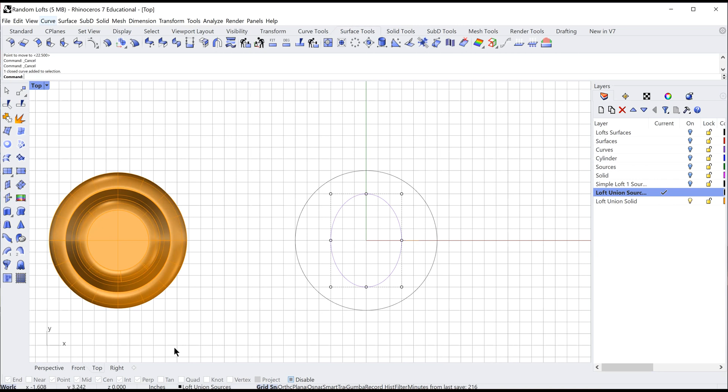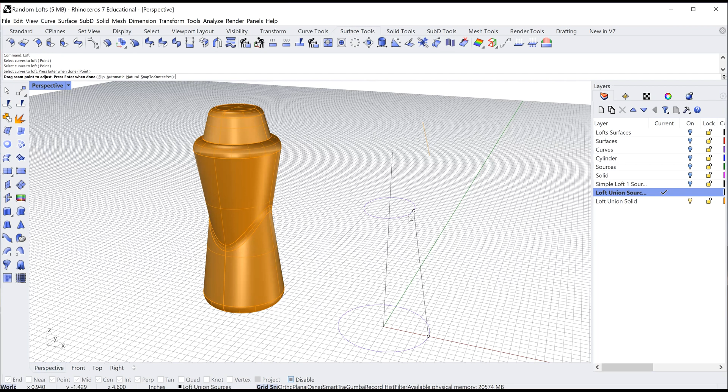So it's actually quite simple. I'm going to loft this, and I'm going to go into my commands, loft, select the bottom, select the top. There's the leading edge, the orientation of the points in the beginning to the end of the surface, and then enter again. And then I have this, and I'm just going to stay with normal.

So there's my loft. Now these lofts, I'm going to mention this now, this is like a cone. I know it's going from an oval to a circle, but I have a straight edge going vertically, which means I can put labels on the bottom part of this shape and the top part. So I could do a pressure sensitive label. I could even do a label that's parallel to the top edge and maybe even dips down in this curve a little bit. So maybe that's part of the look that I like.

So since this is symmetrical, I'm looking at this bottle from the front and I have the negative curve. If we look at this bottle from the right, we have the curve down here at the bottom in a positive orientation. This bottle works in both directions. So it's kind of a unique shape by doing this kind of double loft.

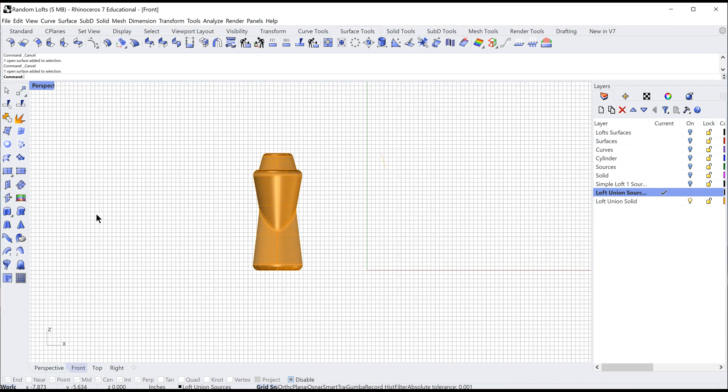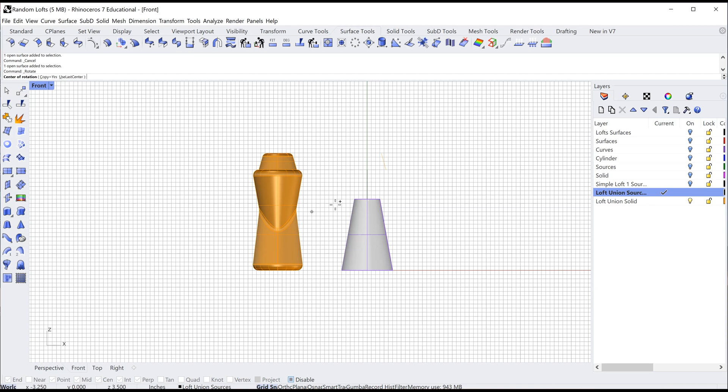So I'm going to select this lofted surface, and I'm going to go to my front view, and I'm just going to rotate this. Rotate a copy. So I'm going right to my rotate tool. You can use the commands. The center of rotation, and I have copy here. I've selected yes, so I want to copy that. So let's make sure I'm going to snap to this top right here. It's going to click here. I'm just going to go 180 degrees, and there's my copy.

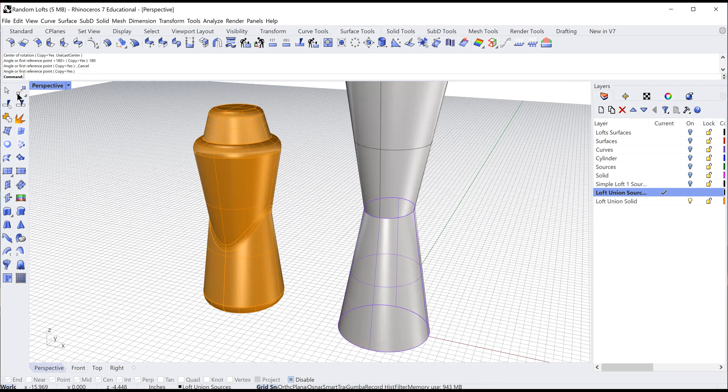So as you can see, the oval section right there in the center is lining up because they're both the same. So if I take this top, let's see, how did I have this one oriented? I'm going to try to keep this orientation.

So I'm going to take the bottom one, and I'm going to select that. And I'm now going to look at this from the top view. All this can be done in perspective. Like I had mentioned before, I like looking at one view at a time. I'd like to kind of follow exactly what I'm doing. So since I'm rotating from the top view, I want to look at it that way. That's just sort of how I like to work.

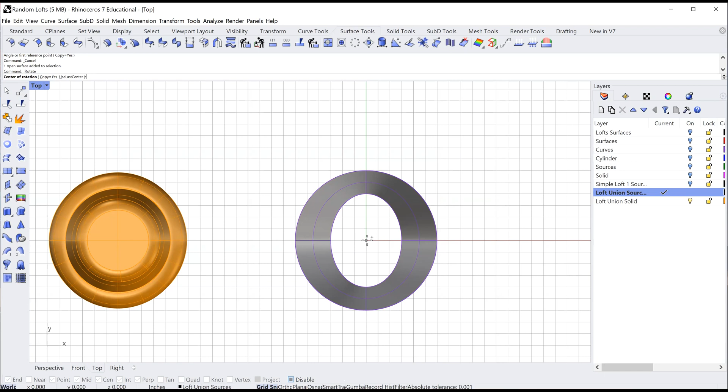So I'm going to go up to my rotate tool again here, and I'm snapping right to the center. Make sure I'm snapping. I have most of my snaps on. Actually, I don't have on. I'm on grid, so that's fine. That'll work. So I'm snapping here in the section. I'm going to take this, and turn that 90 degrees. Two lofted surfaces. I just went into wireframe so I can see the parts.

I'm going to see the curve when I do this. So I'm going to take each one of these objects and trim it from the other. Since they are perfectly symmetrical, I could do it to one and then rotate and spin it into position, or I can do it to each one right here. So I'm going to go with the split tool, right here. I'm going to select that, and it says select objects to split.

Let's start with the bottom one. I'm going to select this object down here that I want to split, then enter. Then I want to select the object I want to split from that, select cutting object. So I'm going to select this one up here at the top, and press enter. You can see that reverse curve that was created. The top object split the bottom object. We can see this nice reverse curve here.

That's what we want. Like I mentioned, I could just take this, rotate it up and spin it 90 degrees and it could line up, or I could just do the operation again. Both ways are perfectly fine. So let's do that again, back to the split tool.

Now I'm going to start with the top one, because the top one is that complete cone. I want to trim that. So I'm going to select the top one, enter, and select the bottom one, and it's going to trim from that one. It'll be hard to see because the curves are going to be in the exact same place. So I'm going to select that and enter.

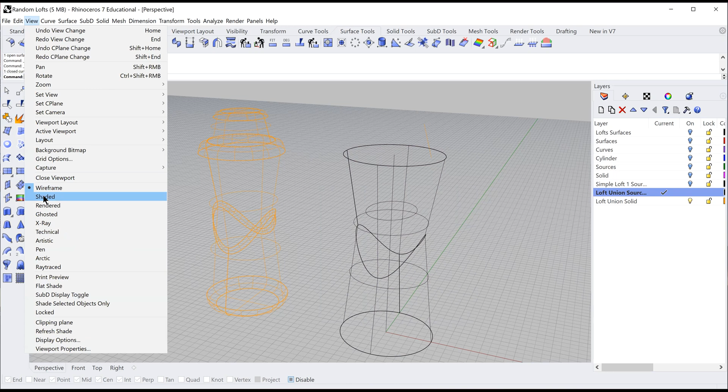All right, so now I have these two pieces. Let's go back into, I guess even if we view this in shaded it's not going to look much different, but we can see this black line now. That means I have these two shapes created. So let's just move that so we can see. Okay, got that.

Undo. So now I want to join these. That's this other tool here, it looks like two puzzle pieces, one's white and one's yellow. I'm going to select that. Again, you can use the commands.

So I'm going to select this top one, and I'm going to select the bottom one, and join. That worked. So let's go back to join. I think I did select, so I'm going to select that, enter. And now we have, this is all one piece. I have that nice line in the center.

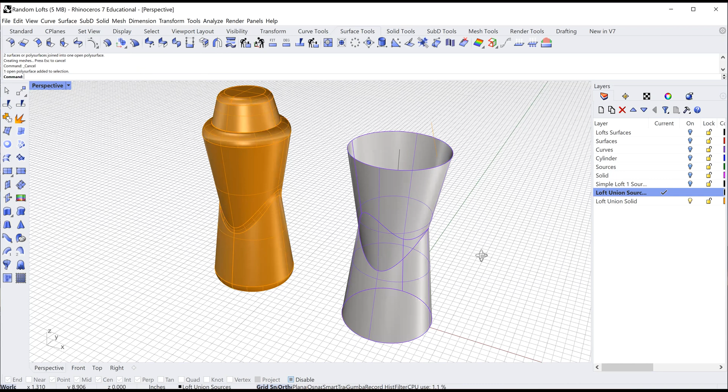So what we need to do now is, this is a poly surface. So we can go over to our commands over here, our properties - it's this little colorful donut. So it's open poly surface, this is all one surface. So I know that I've connected them nicely, but it's open because the top and the bottom are not closed.

So what we can do is, we have a tool in our surface tools, right here. Where is the surface tool? Solids. Yes. No, yes. All right, so now we need to cap planar holes. I can't remember all these commands, I'm just trying to remember where the tools are. So I just remember this tool over here, it's a little white box with a kind of a blue cap here. It's called cap planar hole. So you can put the command on.

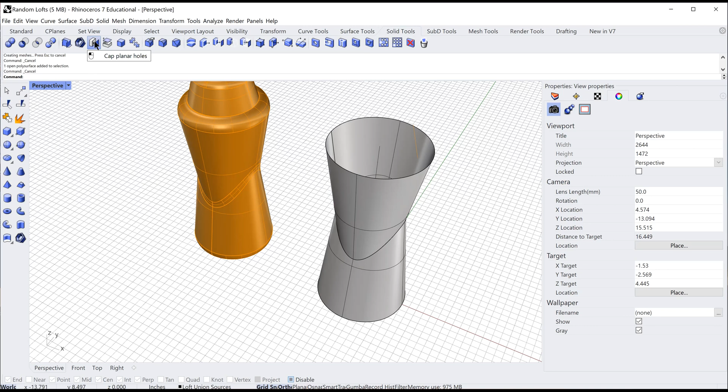So I have a planar hole, which means it's all in one axis. It's flat across the top here, and it's flat across the bottom. So if I use that tool and click on this object, enter, it has now closed the top and the bottom. And what's nice here in Rhino is it's giving me the ISO lines, which are these black lines on that surface. It's also helping to ensure me that I have done this correctly.

So now if I were to select this and go to my properties, now it's called a closed solid poly surface. That means I'm good, that can be 3D printed as is. It's a nice closed shape, so that's ready to go.

Okay, so now let's fillet it. I'm going to use the command fillet edge. So I'm going to select my edge, which is that purple line. Oh, it didn't go all the way, so there are a couple of them. So that it's 2 because it's split front and back.

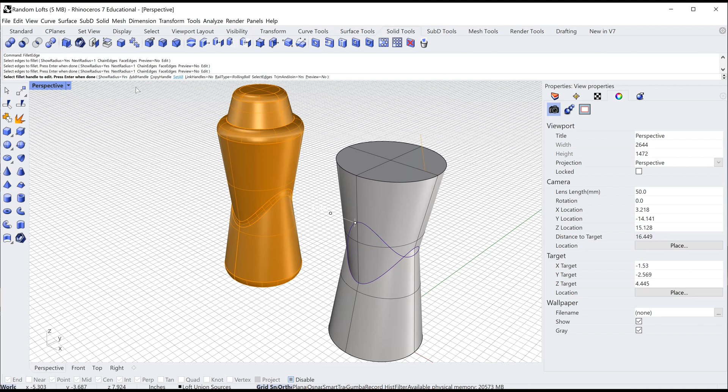So I'm going to select, they call it handle. I'm going to turn this around so we can see that white number there. So when they say handles, there's 2 dots. So after we select our edge, you press enter. Now we need to press the first handle, which is on the edge I'm radiusing. And then we are going to select the second handle.

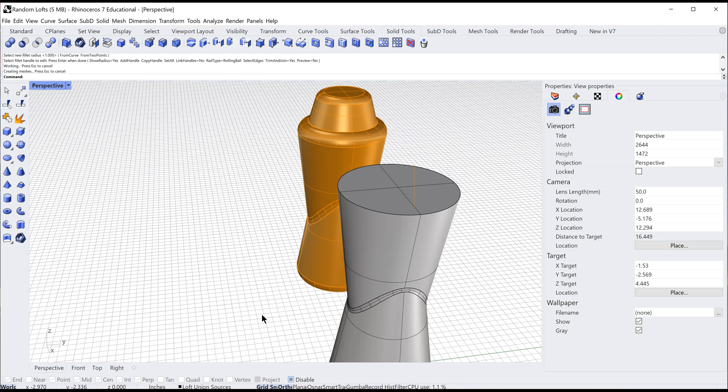Hold on, I think I need to go to here. It's a little hard to see. So I'm trying to figure out what I did do there radius-wise. Let's try that. All right, so that's a little bit tighter than I did last time.

Bottom. Enter. Okay, right here at the top. So I have those selected and I entered. There's a command up here and it says link handles. Right now it's on no, so I'm going to put that on yes. That means that whatever radius I do to the top will be exactly the same as the bottom because they're linked. So the command will happen all at the same time.

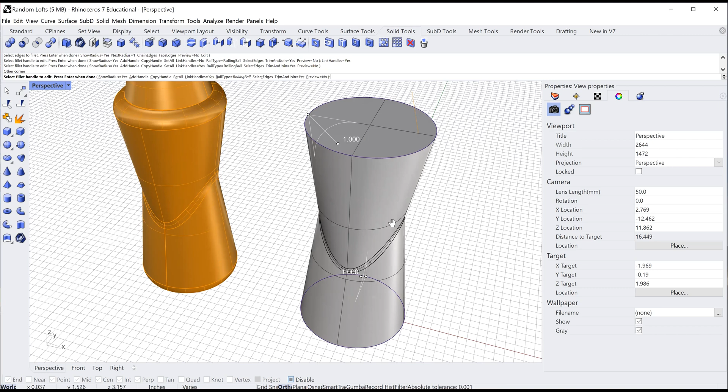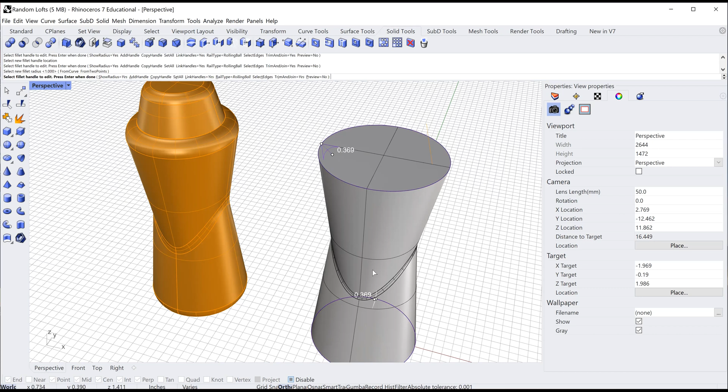So let's move this down a little. So now I'm going to select my first handle, which is out here. Select that, enter. So now this little part is selected because I have my selection color in purple. I'm going to select this other handle here, right by the 1. And I'm going to move that. Now the bottom one isn't moving yet, but we'll see that move. I am going to go to, I think, approximately 3/8. Let's go here. See, the bottom one did the exact same thing. I'm making those exactly the same.

So I have those selected. I'm going to press enter. And now we have that radius top and bottom. It's about what I had. I don't remember the exact numbers, but it's close. I know this radius in the center, I made this a little bit tighter than I had done originally.

So this is very close to being done. I have this source right here. I'm going to just use a revolve. That source right there is how I made this cap. So this will get a little redundant. We don't really have to spend a lot of time on this. Let's...

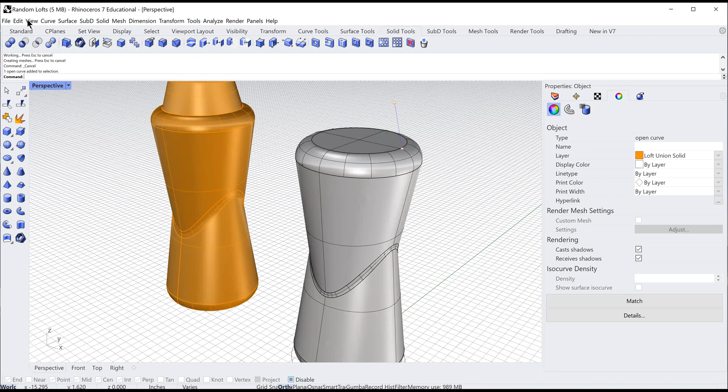See, let's go to wireframe. I'm going to use my center line and go to my revolve tool, which is under, like I said, with the command in. Revolve. Start of axis. So I have selected my source, that one line. So I'm going to use the axis. Can I? I should be able to.

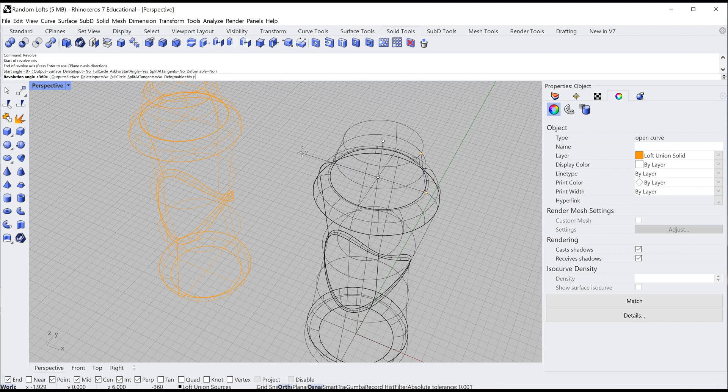So I'm going to select this top edge here. Enter. And I'm coming out here. And you can see my revolve. I'm going to keep the grid snap on because I want to make sure this goes all the way 360. So there it is. I'm going to come all the way over to this side here and click enter. So now I've created that surface.

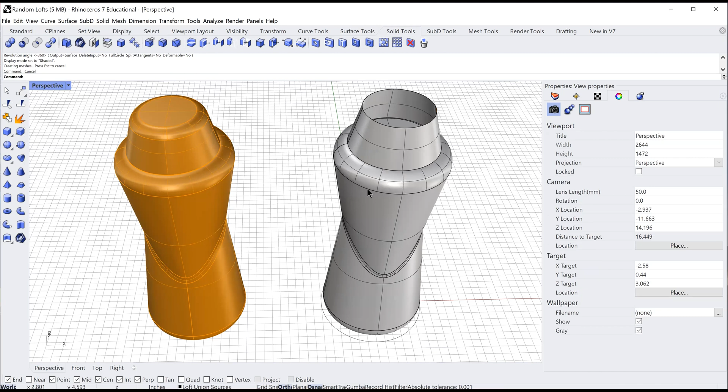Let's just go back into shaded. So there it is. That's that surface. All I have to do is cap the top and the bottom. And it's the same tool that I used last time. It's in Solid Tools, not Surface. It's called Cap Planar Holes, which we can use the command. So if I just select that, and then I select this part and enter, it has now made that a solid. So there's a top and a bottom, and all I have to do is radius the top.

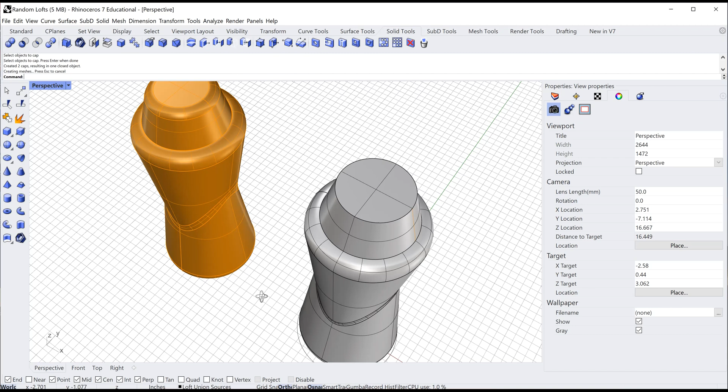I'm not detailing thread patterns. Quite often when I do these bottles, I'll get those from the manufacturers. I'm not going to spend time building thread patterns and tolerances and all that, not unless I have to for a visual point of view, because most of the time I get those from the vendors and they're perfectly detailed and engineered with the tolerance so it fits and grabs just right. I don't need to spend my time. I'm more interested in the design. So when I work on a project, I'll get thread patterns and those details from the vendor. They'll send me the 3D data file. All I do is bring it in and attach it to my design.

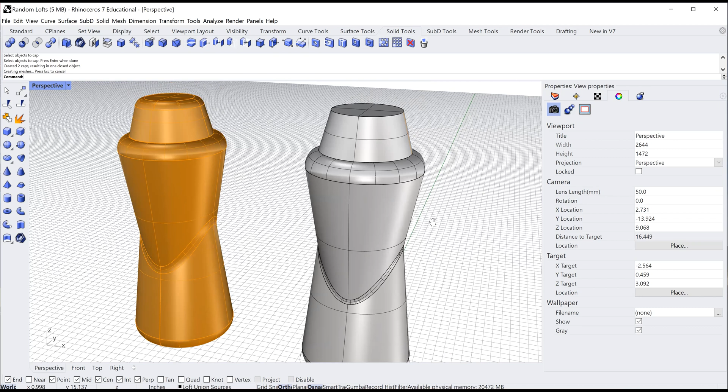So that's a pretty typical scenario. So that's that bottle, 2 lofts. It can have pressure sensitive labels on it. And then I just designed this closure to fit.